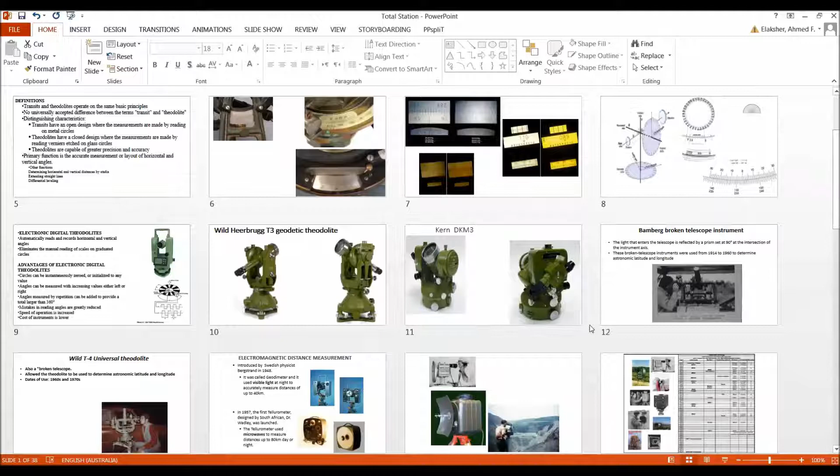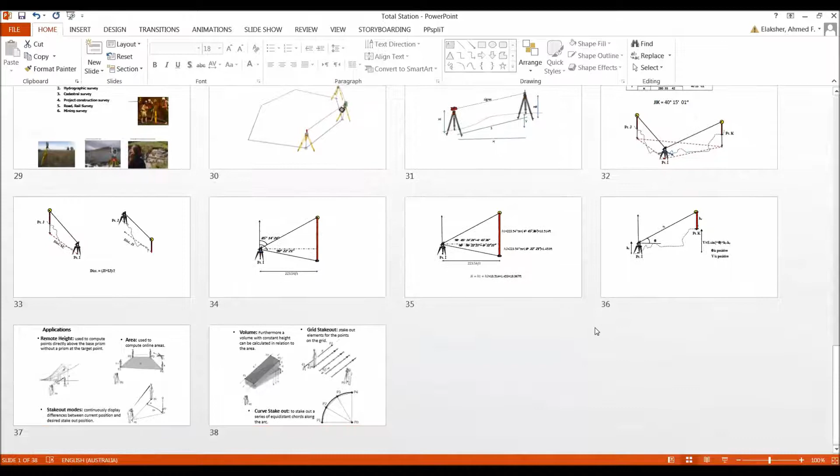How do we link this lecture to the previous one? We've talked about directions, distances, levels, and angles. So the objective of this lecture is to talk about another instrument called the total station. I'm going to go through its different components. It's basically going to measure angles for us, both vertical and horizontal. I'll show you how we measured angles in the early days, since we still use some of this equipment somehow today. Then measuring distances with equipment called EDM, electronic distance measurement, and how we integrated these two into our new system, the total station. That's the objective, and we'll also see some kinds of total stations and their applications.

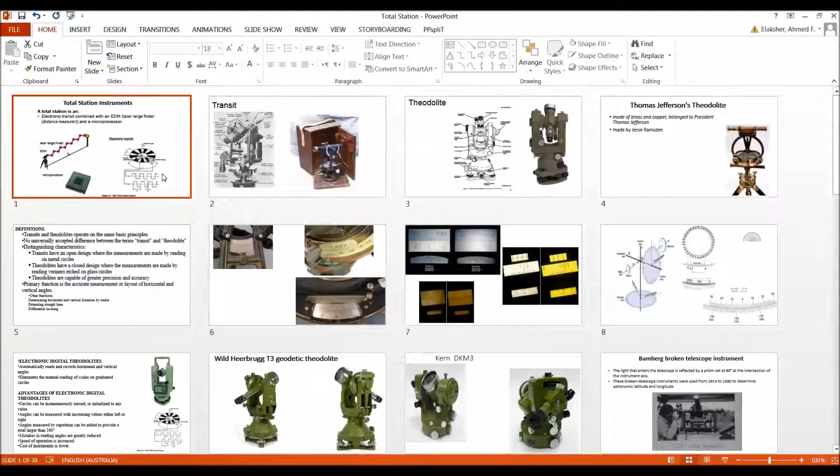So what is a total station? It could be defined as merging two of our old pieces of equipment. Again, old here is a little bit, I wouldn't say incorrect, but we still use some of this equipment somehow.

In the early days, we had what we call a transit, used to measure angles, whether vertical or horizontal.

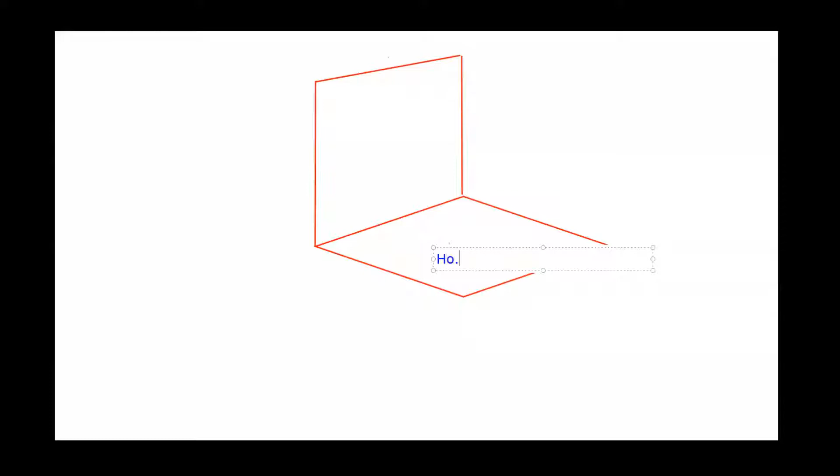I'd like to make sure we remember that in surveying we measure two types of angles. Let me grab this tool. This is our horizontal plane, and this is our vertical plane. In surveying, we can measure horizontal and vertical angles.

Horizontal angles are measured in a horizontal plane. We level our equipment so this surface becomes horizontal, and we measure angles in that surface, which are horizontal angles. Angles perpendicular to this surface are vertical angles.

So back here, hopefully this is a quick intro. This is the transit. I'll show you some of these nice transits. Remember, our objective is to talk about total stations here.

So plus the angles, we also measure distances between the center of the instrument and the reflector, and I'm going to show you that.

If you merge these two into one piece of equipment, that's a total station. Then we add a microprocessor and an electronic storage unit, like a memory card. That becomes our total station.

The purpose of the microprocessor, the computer chip, is to do calculations for us. The equipment measures angles and distances, but the microprocessor can compute components like vertical distance, horizontal distance, and coordinates from what you measured.

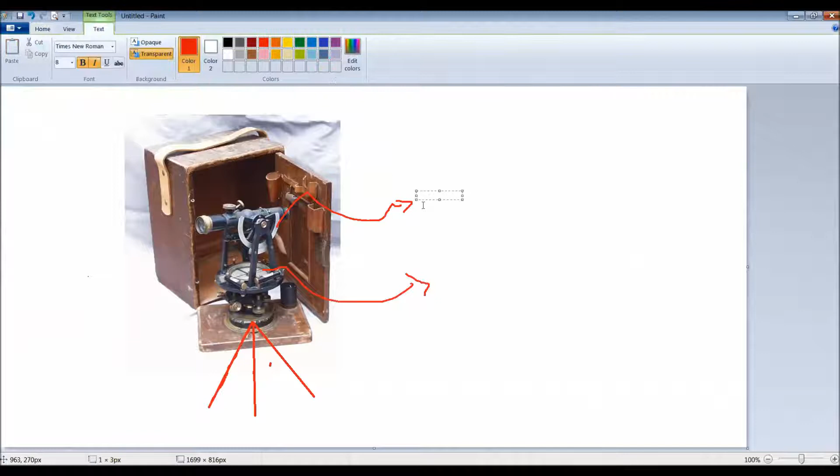So this is here the vertical. Let me make this a little bigger here - vertical circle. And this is here what we call the horizontal circle. So these here are what we use to measure both vertical and horizontal angles.

And you see the vials here, this vial - let me clear the arrows here - this vial and this vial. These are two perpendicular vials that we use to level the equipment through the screws.

So it's kind of what we have now, just a little bit different in setting it up. These are the screws we use to level, and these are the two level vials. So it doesn't really have a circular bubble here.

This is the old transit here, this is the very old transit. And this here is where we set the plumb up. Of course, we didn't have laser plumbing at that time.

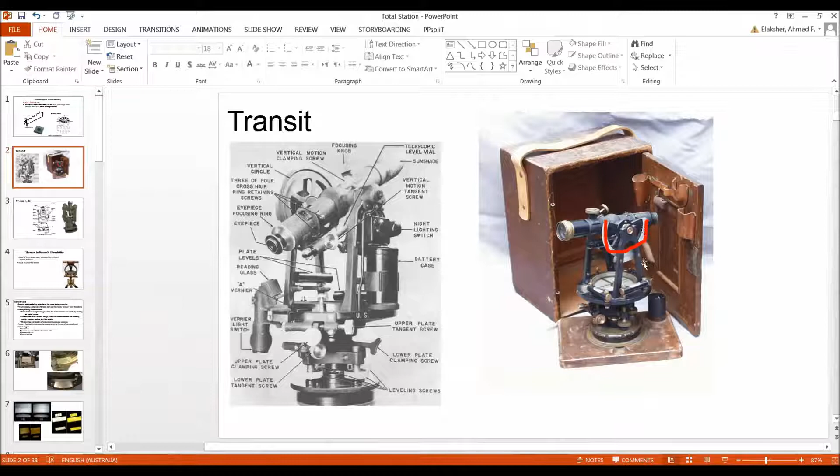Okay, so going back to the total station, so that's the transit here. And then after the transit, if you look at the transits here, to read them you have to look externally. So then they came with what they call the theodolite.

That's the scheme diagram of the theodolite, and that's an actual theodolite here. So the big difference between the theodolite and the transit is they have now the horizontal and vertical circles inside these compartments here. So this is what we call open versus closed design.

I highlighted these differences here, the difference between a transit and a theodolite. So you really, I'm going to go over this, read them quickly, but you really will find everything in this slide here. Okay, let me go to paint and put both of them together.

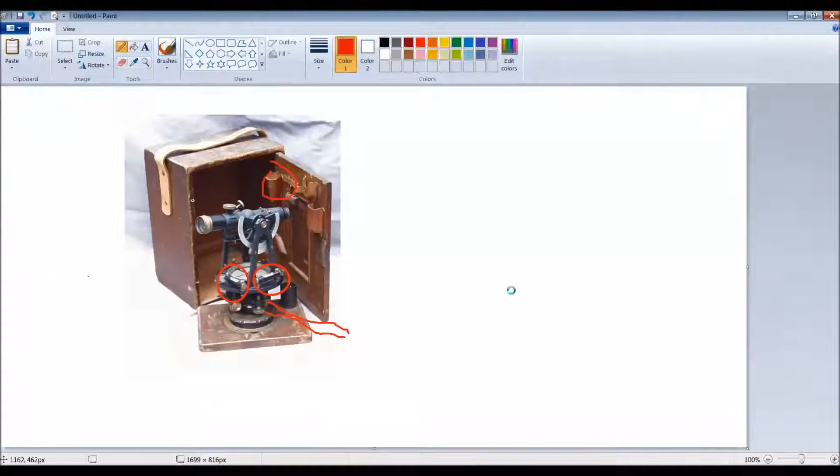So this is a transit here, this is what we call the closed design here. This is the vertical circle, and this is the horizontal circle. Now we see our screws that we use - these are the screws that we use here.

Now, how do we read the vertical and horizontal readings here? Well, the horizontal reading and the vertical readings are going to be somehow, through some mirrors, projected, and we can see it - maybe this is the wrong arrow here - we can see it through this lens here.

So this lens is where we can - this one here is where is the A? - this is where we can look inside and see our readings. So now, since they are closed, we can't really look outside. We can look through this lens and see the readings.

And if you see this part here - I used theodolites a lot, I didn't really use transits, maybe in a competition or something - this is here, you see this piece here. This piece here, if you open this part, you will get the light inside, and the light will lighten the whole thing from inside so you can see it.

In daytime, you reflect the sunlight inside, or in nighttime you can use any outsource light. Okay, we see also some of these knobs here - this is one knob, this is another knob. These knobs here are either used to clamp the circles or to prevent the circles from moving, so you can't really force it to move, so it makes the precise measurements.

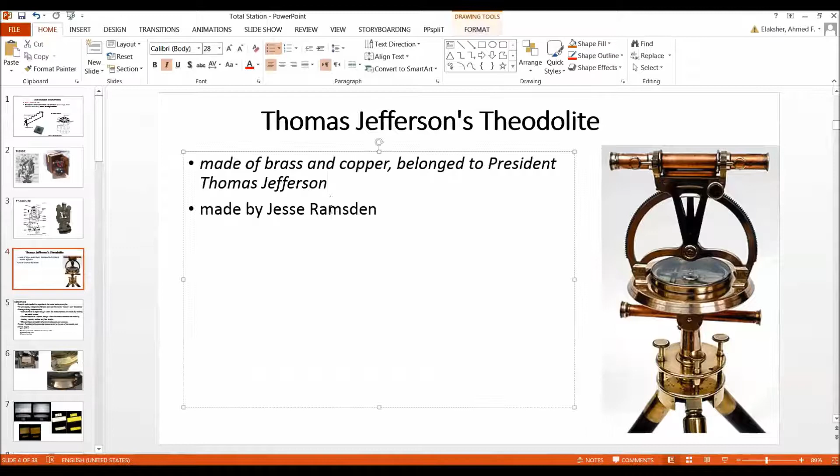Let's see what we have. We have the Thomas Jefferson theodolite, the theodolite that Thomas Jefferson used. That's a very unique antique piece here, I wouldn't call it equipment now, but an antique instrument made of brass and copper, belonged to President Jefferson, and made by Jesse Ramsden.

Going quickly here, transit and theodolite operate on the same principle. We've talked about that. There's no universally accepted difference, except the open design versus the closed design for the transit and the theodolite. Theodolites, since they were more modern than transits at their time, had more precision and accuracy.

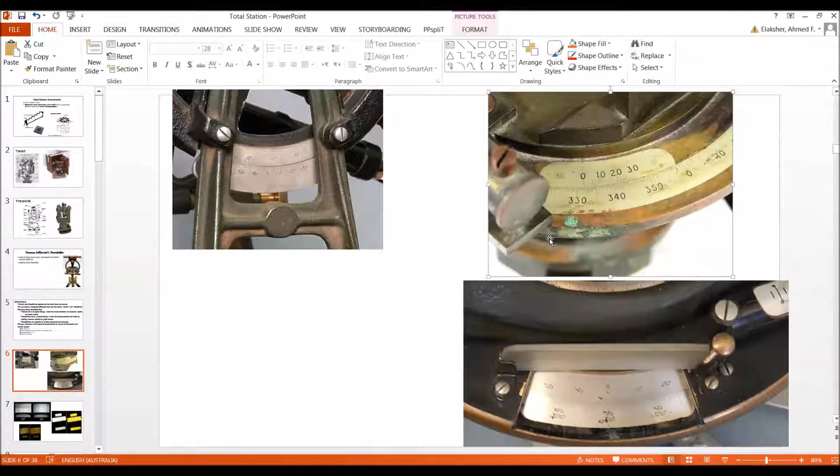Looking a little bit inside, you see the readings here, where we get the readings. I'll pause and you tell me, is this a theodolite or a transit? Some of you are saying theodolite, and that's the correct answer. This is inside a theodolite. You see how the readings are reflected, and it needs some practice to know how to do the readings here. Once you know how to read the vertical and horizontal, it should be simple.

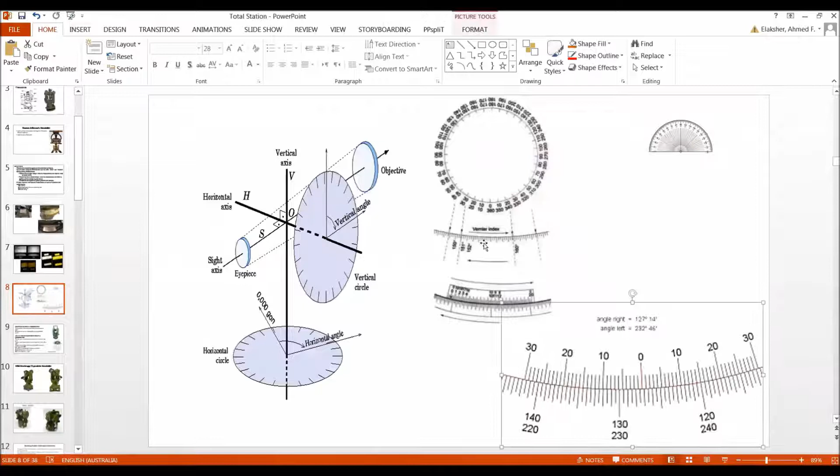So this is from the inside, this is how it operates from the inside. That's just the general scheme here. But let me get this sketch and put it here, and now let's talk a little bit more about the theodolite than the transit.

This is the vertical circle. This is the horizontal circle. This is where you sight, so your eye or the observer will look from here. And then we have the eyepiece, and this is the object lens or objective lens. This is the scheme of this instrument.

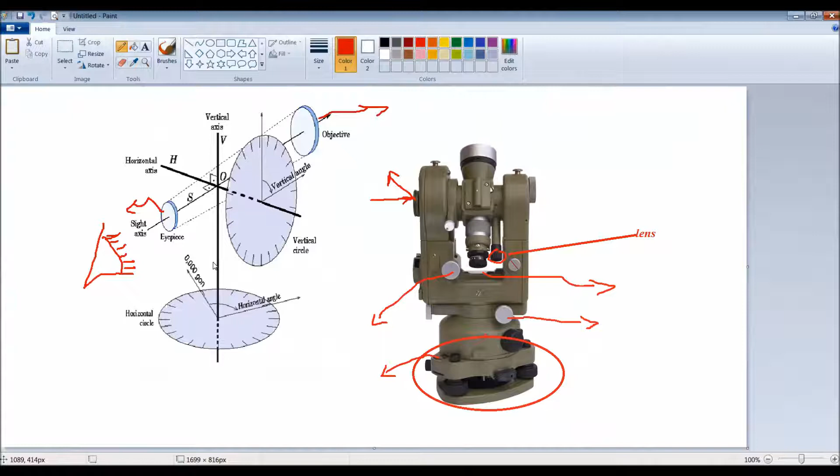Now watch carefully here. We have the horizontal circle, and this is the line of sight. So if I drew here, let me get a clear one so you know what I'm talking about. Let me clean this and put a newer one, just make it a little wider here.

If I drew a line here, this line is perpendicular to the horizontal circle. And I'm going to draw another line, using a different color here, through the lens, so this line goes through these lenses. This is what we call the line of sight.

So if you've got the lenses, let me draw them again. You have the object lens, and then you have the eyepiece. The line connecting the eyepiece, the center of the eyepiece, and the object lens is what we call the line of sight, connecting the center of the object lens with the eyepiece.

If you want to see it in a different way, I can show it to you this way. Let me open a new paint. Going back to our paint, you see this is the scope here. There is a line connecting the center of the eyepiece with the center of the object lens. This is what we call the line of sight.

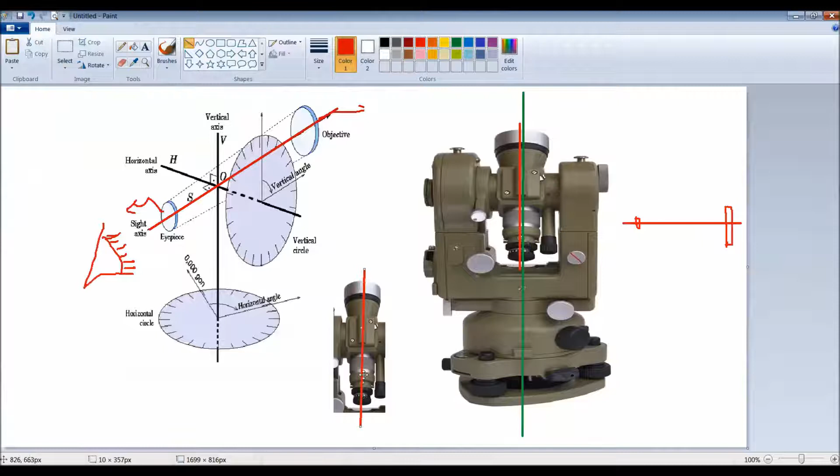This is where you look through, and this is your eye here. You look through, this is what we call the eyepiece, and this is what we call the object lens. So the line connecting both of them, that's what we call the line of sight. This is the red line.

And there is another line that I just highlighted, which is perpendicular to the horizontal circle. So if I go back here and cut the horizontal circle, bring it here, this is our horizontal circle. There is another line perpendicular to the horizontal circle, this line here. Let me draw it in the same color, this green line, which I'm highlighting here as green. Hopefully we see these lines here.

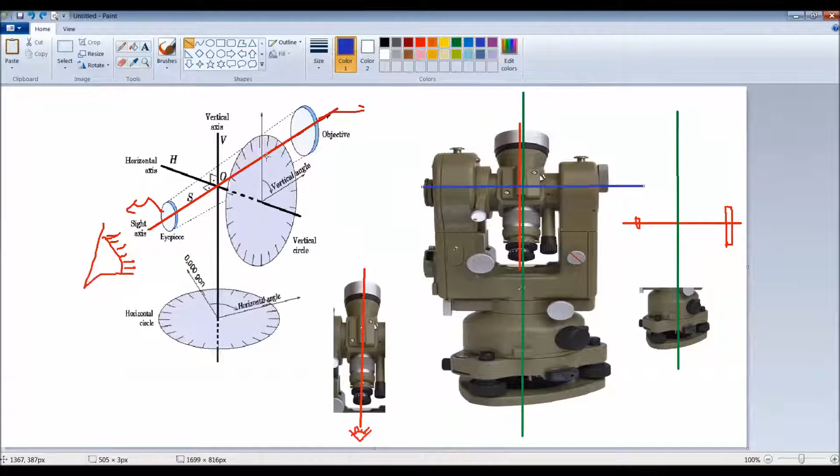And then there is a third line, which is perpendicular to the vertical. Let me draw it in another color, which is this line here. That's the line perpendicular to the vertical axis. If I draw the vertical circle here, this line is what we call the horizontal axis. Sorry, did I say this is the vertical? Let me write it down, maybe I was saying them wrong.

So this is what we call the horizontal axis, and the green one, which is this one, is the vertical axis. Let me also write the line of sight.

Okay, so these three here have a geometric relationship. We are going to talk about the geometric relationship between the horizontal axis, the vertical axis, and the line of sight. These three lines have to be perpendicular. So this is what we see here.

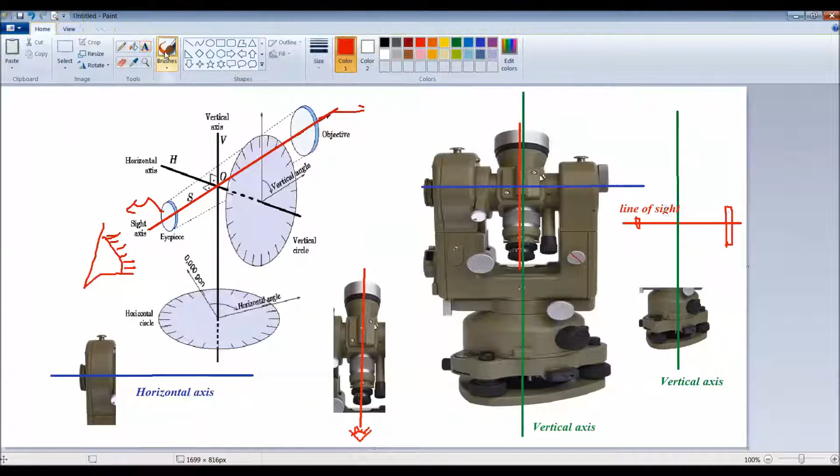We see the line, let me come to this diagram here. Okay, so the first thing is you see the vertical axis, which is in green. The vertical axis and the horizontal axis, and from the names they have to be perpendicular. You see the horizontal, I drew it in blue, going with the colors here. So the vertical I drew in green, horizontal in blue.

So these two lines have to be perpendicular, the blue and the green. That's a very important concept. Due to a lot of things, the instrument could be defective, not calibrated, malfunctioning, all of these different things could cause these two lines not to be perpendicular and give you wrong readings. So you have to calibrate your equipment every once in a while.

Plus the blue and the green line, yes, they have to be perpendicular, as you see this perpendicular angle. The other thing also, the red, the line of sight, and the horizontal axis have to be perpendicular. So these two also have to be perpendicular, the red and the blue, which are the horizontal axis and the line of sight.

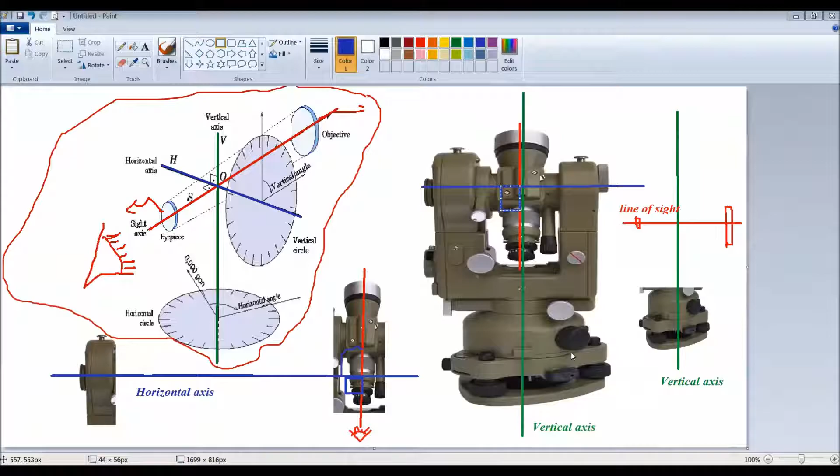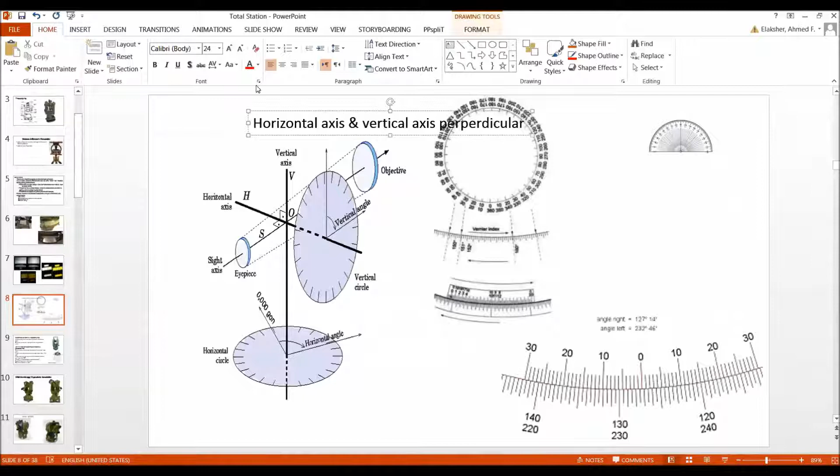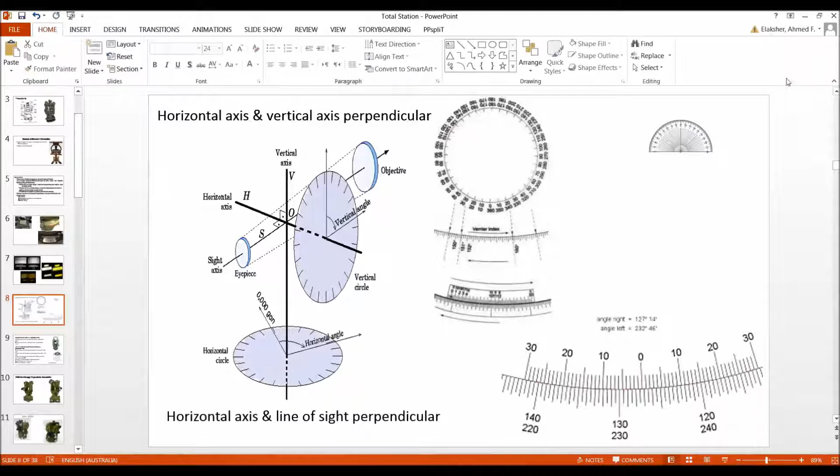So these are two important geometric relationships that have to be satisfied between the different components of the equipment. That's the important geometric relationship. I'm going to write it here. I didn't want to write it in the presentation before I show it to you. So: horizontal axis and vertical axis have to be perpendicular. And then the next thing is, the horizontal axis and the line of sight have to also be perpendicular. So these two have to be perpendicular.

Okay, so we were just talking about the different components of a theodolite, and just to highlight another advance in the theodolite equipment, that's what we call the electronic or the digital theodolite. So with the digital or electronic theodolite, now everything is done digitally. You get the readings on a display. The readings are done automatically.

Actually, what happens here, instead of using our protractors or the optical ones, now we use digital protractors, or digital circles. It's a little bit more electrical engineering here, but there is this rotating circle, and the rotating circle has alternating white and black sectors. Light passes through, and once you rotate it, there is a sensor that can sense how many sectors you rotated. The sensor can determine how many sectors you passed and then convert this into a horizontal or a vertical angle.

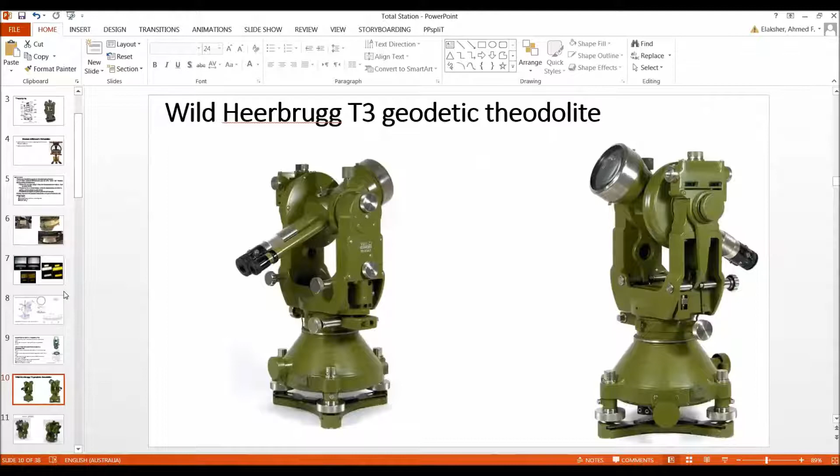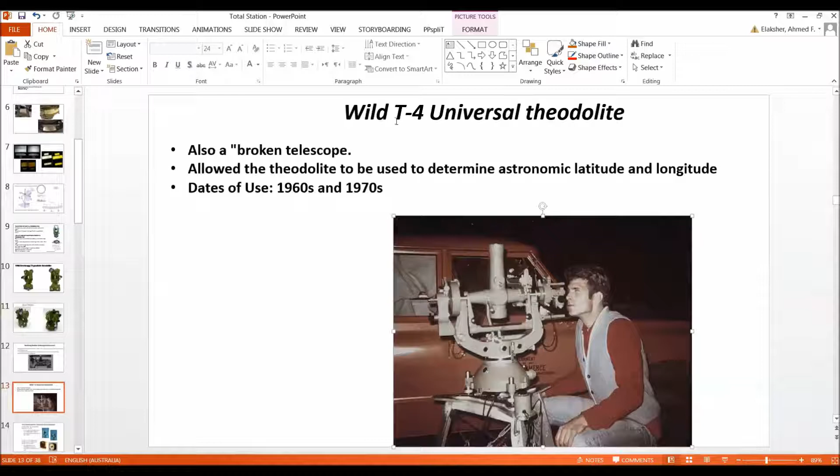And the idea here about using the broken telescope is we are observing stars, and stars have very high altitude. So if you looked at the star here with our equipment, that's the tripod, and the star is going to be all the way somewhere here, and we have a star here. Yeah, so with that altitude...

If this is the vertical axis here, and you are observing the star, let's pick another color here. This angle here is going to be too small because you are observing Polaris and such stars. So you might have difficulties observing these stars, and that's why they made the broken telescope here. That's why they had these broken telescopes. That's not really an important part, just wanted to show you.

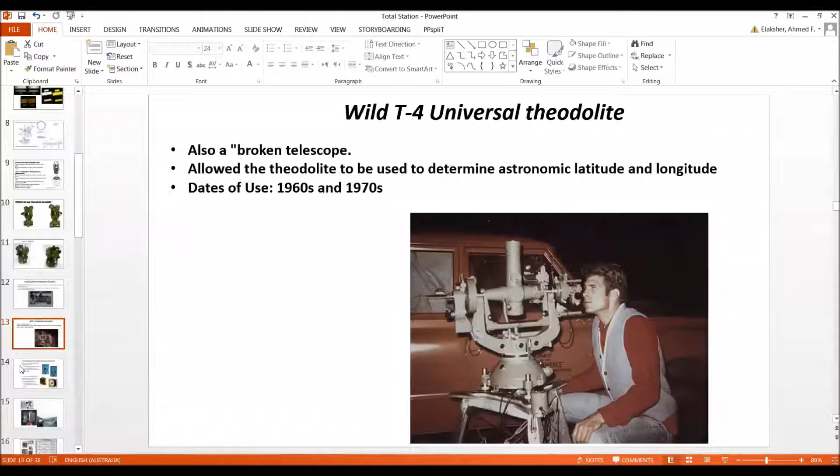Now we go to the second.

Okay, so the second part of the equipment, of the total station, if you still remember, is the distance measurement unit, and that's done through an electromagnetic device, or an EDM device.

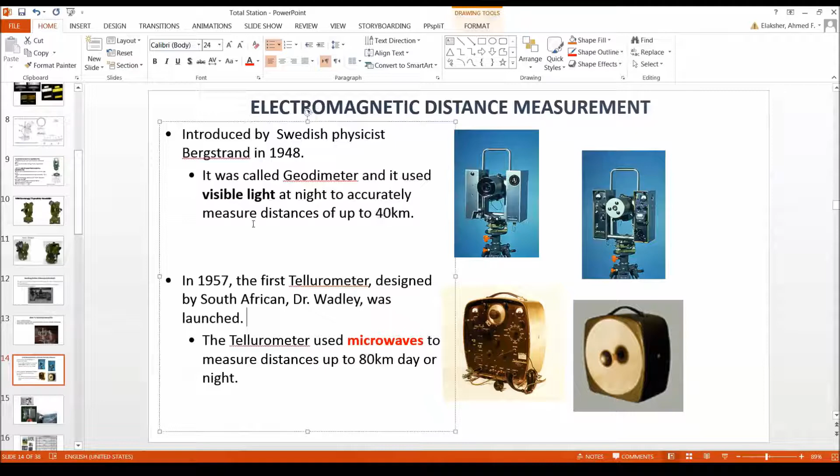Then, about 9 years later, came what we call the tellurometer, and that was designed in South Africa by Dr. Wadley. The good thing about this instrument, the tellurometer, which is the one we see in these two images to the bottom right of the screen, is that it used microwave, and this is what I'm highlighting here. So with microwave, we could use it daytime, nighttime, plus also it had a longer range, which was 80 kilometers. You don't really need to know or remember the ranges, but you need at least to know which one was using visible light and which one was using microwave.

So we'll take a look at these, but this is just one of the early models, or actually two of the early models here. You don't really need to memorize the range and the accuracy, but I'm just going to grab this here and go to paint and highlight some of the properties of each of them.

So let's see, paint will show up here. Paint is here. Okay, so this is the picture I had here. So in the early 60s, we had the MRB2 that had a range of 40 kilometers, but an accuracy of 1.5. If we zoomed in a little bit here, this is the one I'm talking about for those who are watching. We'll highlight this. So the MRB2, that's the one here, and it had an accuracy of 1.5 meters.

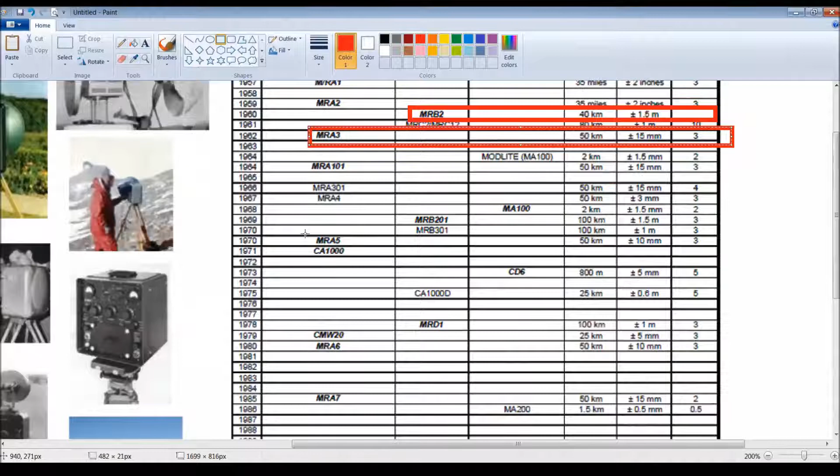The early ones that had good accuracy were the MRA3, and that had 15 millimeters. Again, you don't really need to memorize or recall these. And then in the 70s, we had the MRA5, that was about 10 millimeters. In the 80s, we had the MRA6, almost the same as the MRA5.

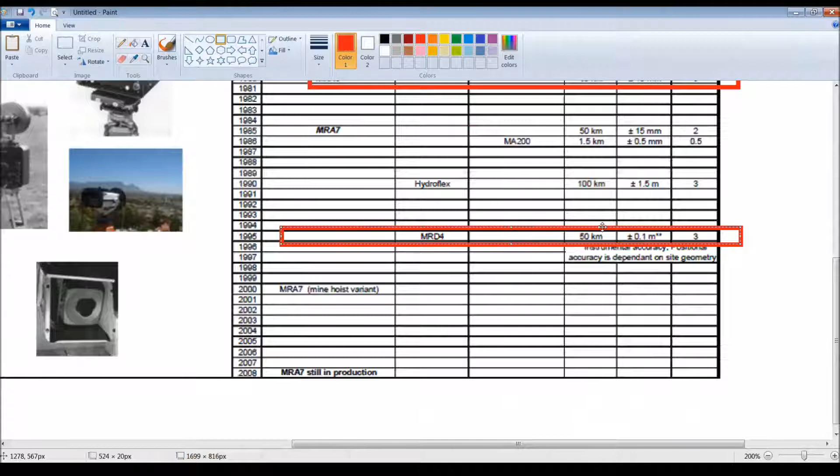In the 90s, we didn't really have a lot of new ones. The other one that I would like to talk about is the MRD4, which had about a decimeter accuracy. You know, 0.1 meter is 10 centimeters is 1 decimeter. So these are a few of them. You don't really need to recall them or memorize them. This is just some of them.

Okay, so back to the presentation. These are some of them. How does it work? Here is the important part. Let me put this into slide show mode and share the slide. Okay, so hopefully this is working.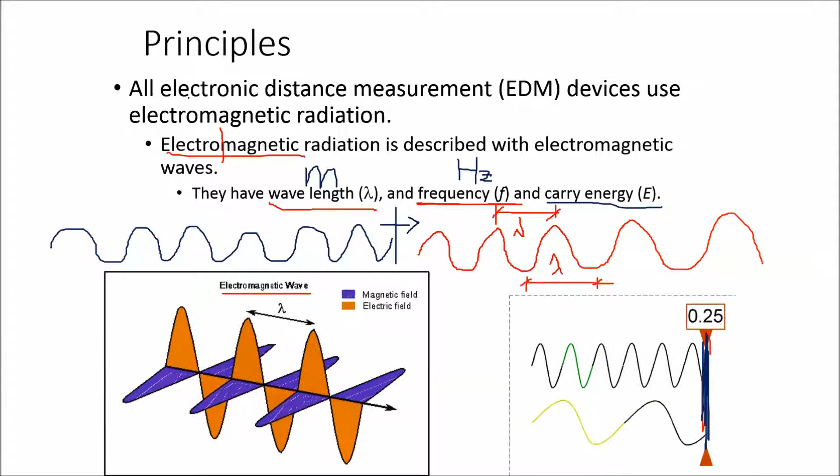The next slide shows the big spectrum of electromagnetic waves. It starts from gamma rays all the way to radio waves, or flipped, from radio waves to gamma rays. The wavelength of gamma rays is about 10 to the power of negative 12, with a frequency of 10 to the power of 20.

Radio waves have wavelengths of about 1 meter, and their frequency is about 10 to the power of 8.

Our eyes are only capable of seeing a very small, tiny part of the electromagnetic spectrum, which is what we call the visible part of light, ranging from 380 nanometers to 780 nanometers, which is 3.8 times 10 to the power of negative 7 to 7.8 times 10 to the power of negative 7. So that's what our eyes see.

So what does this have to do with our class, with our part? Because all of the EDMs, or electronic distance measurement devices, operate in this range here. That's the range.

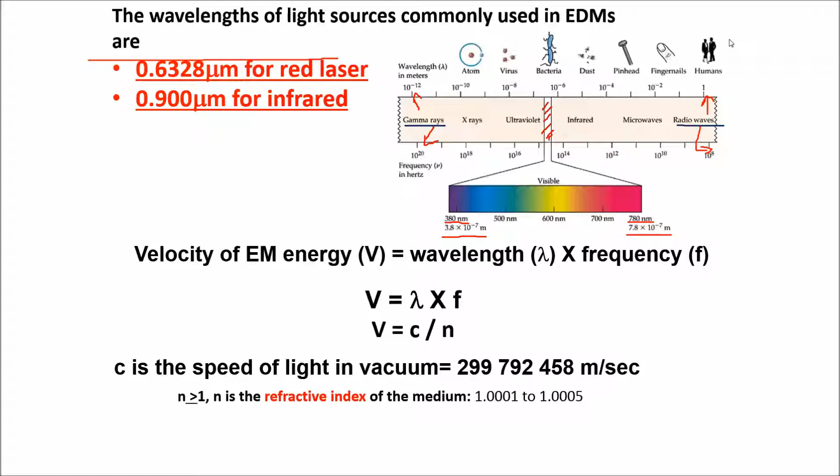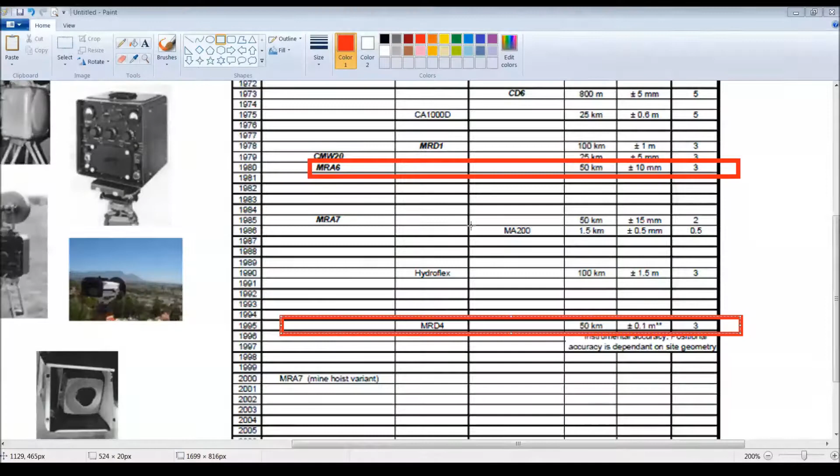Let me end this and go and take this here, and then go to paint. No, doesn't work, okay, don't save.

Our EDMs, our electronic distance measurement devices, work in the range shown in the PowerPoint slide, let me grab this for you guys. They work in this range, 0.6 to 0.9 micrometers. So some work very close to the visible light, using infrared and red lasers. Depending on the instrument, the company, the brand, they work in this 0.6 to 0.9 micrometer range, very close to visible light.

So most of them work in this range. Remember: red laser, infrared. I'm not really interested in the exact numbers, but at least know the red laser and the infrared.

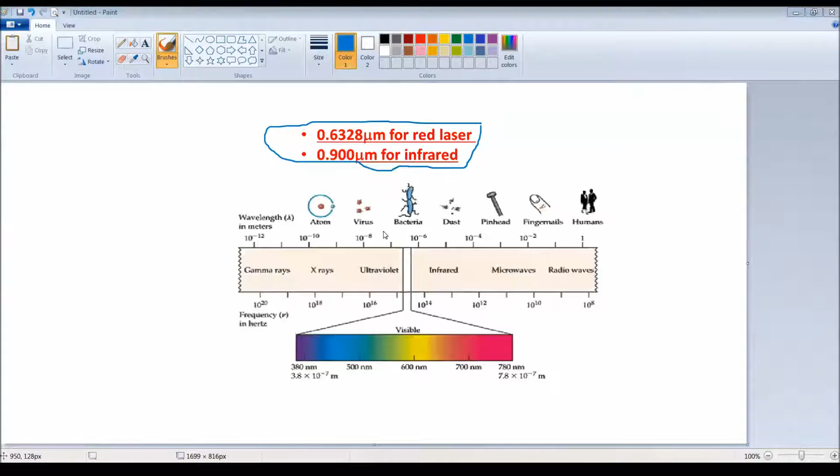Going back to total stations, or the EDM: when these waves propagate, I mentioned they have an energy, and a very important characteristic of that energy is its velocity. How fast does this wave propagate in the air or the medium carrying it? That's a very important thing.

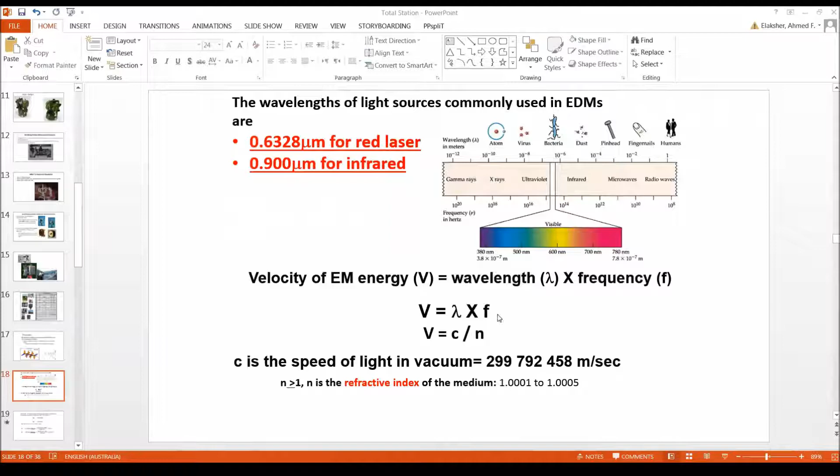I'm going to take this screen to paint to talk about it in a bit more detail. So, new, don't save. Let's take a look at this velocity thing.

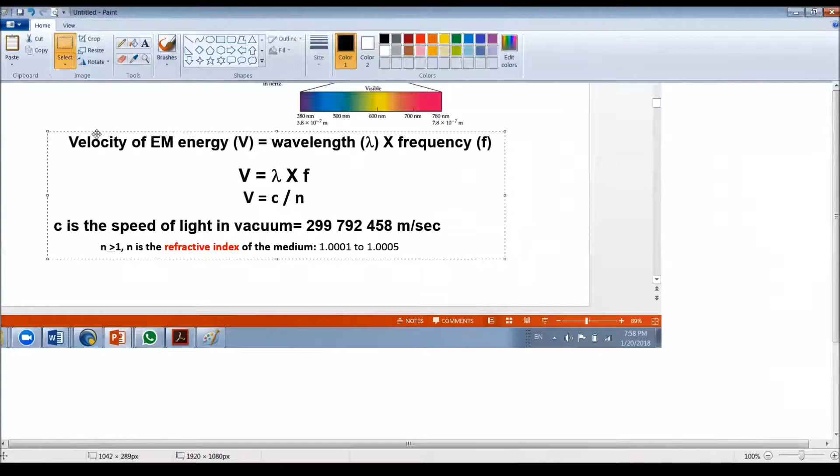Getting back here, this is the equation we are using, and we were saying that this wave is going to propagate like this, and when it propagates, it's going to propagate with a speed. This speed is really very important for us, whether it's propagating with V or C. So what's the difference here?

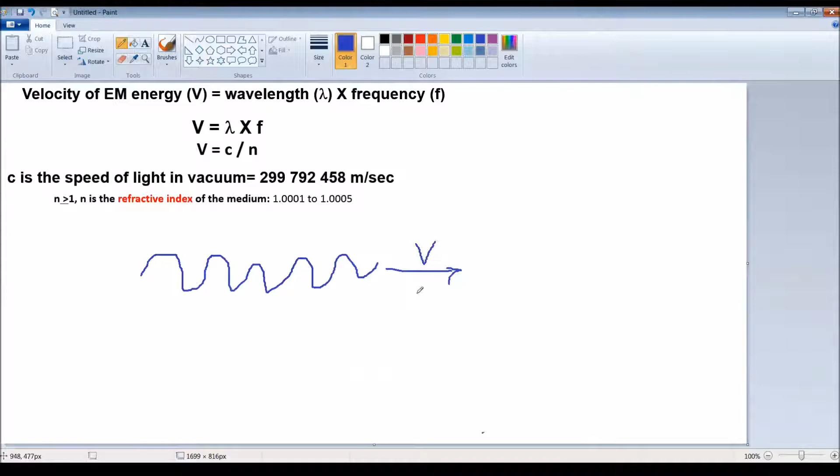If it's propagating in vacuum, that's the speed of light. It's going to propagate with the speed of light, which we usually call C, equal to 3 times 10 to the power of 8 meters per second. That's the speed we recall from physics, in case it's propagating in vacuum. Let me highlight this for you here.

So when they propagate in different media, what's going to happen is they are going to be slowed down, because instead of propagating or moving in a free vacuum, they are going to be faced with the particles of that media. So they are going to be slowed down. And that's why when they propagate in a media, this C here is going to be a little bit less.

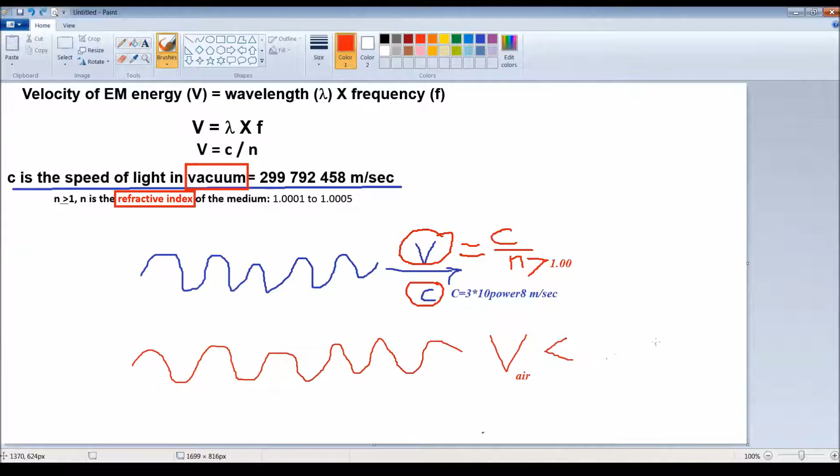But the v is for sure going to be less than n. So the v is for sure going to be less than c. Just typing n. Why? Because we divide by n. That's a good c. Now, okay, so now we know that v is less than c.

What's the next thing? Well, we also know from this equation that v equals lambda times f. So let's see an example here. How do we apply these equations to determine either lambda or f?

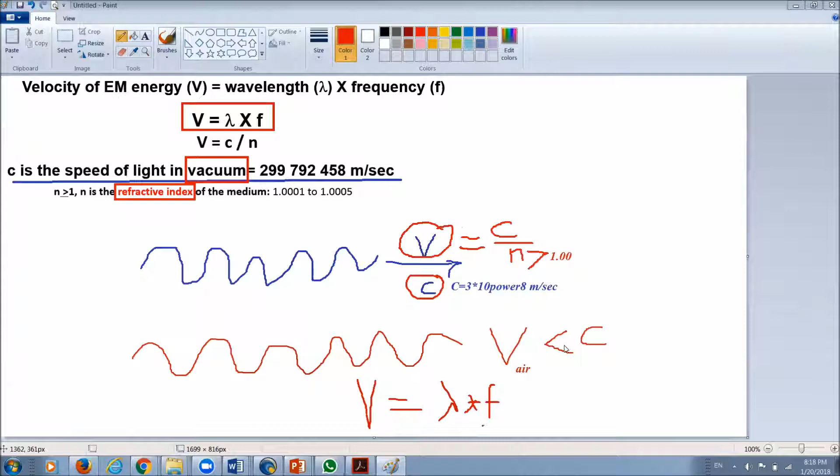Let's see the example I prepared for you here, which is this example. I'm going to take it and put it in here. Let me make sure I'm sharing Paint here. Actually, I was not sharing Paint, so now you should see the example here. So let's read it together.

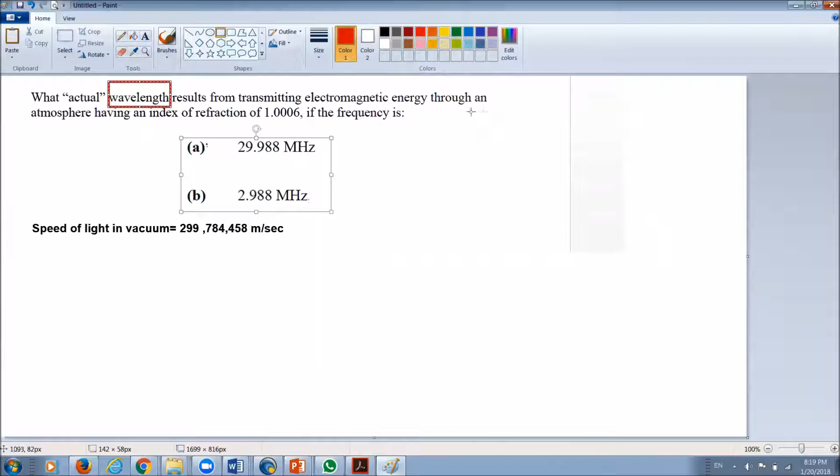We're looking for the actual wavelength. I usually like to highlight what's given and what's required. So it's asking us for the wavelength resulting from transmitting electromagnetic energy through an atmosphere having an index of refraction, so n is given. If the frequency, and I'm going to work with A and let you guys work with B, you're given the frequency, and you're also given the speed of light in vacuum.

So if you think about it, you know that V equals exactly lambda times F. At the same time, V equals exactly C divided by N. So what in these five are you given? You are for sure not given V, you are given F, you're not given lambda, so that's a question mark, that's the required. You are given C and you are given N.

So what can you do here to get lambda? Exactly, you just rearrange terms. You say lambda equals C divided by N. I'm just going to make it in one line, and then add another denominator here to put the F. That's it. And then you plug in the numbers.

Let's plug the numbers here. Let's see if this thing is going to help us. So what's C? C is this value. Okay, Control copy, Control C. Perfect. And then you divide this, let me use the correct color here, by N. Actually, working with a computer is nice here, instead of writing these numbers by hand. Paint is helping, oops, I need to copy this.

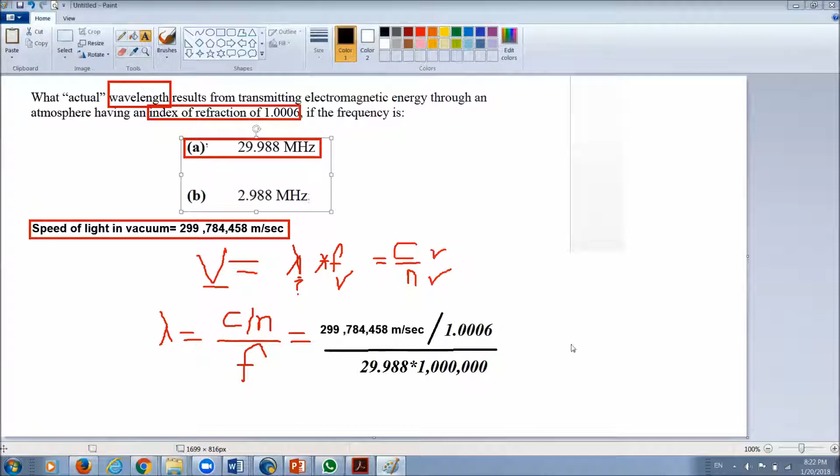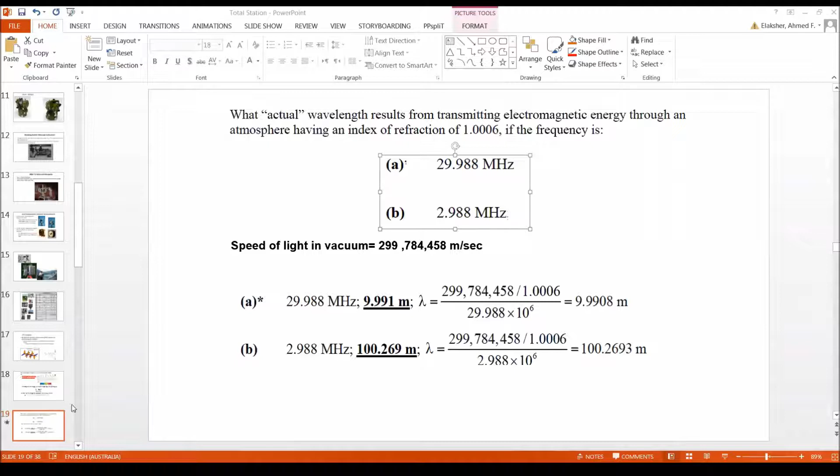And then you do the math and you get the answer, and the answer is displayed for you here. It's 9.9908 meters. And you have another example here, so please work it out also and make sure you get these numbers correct.

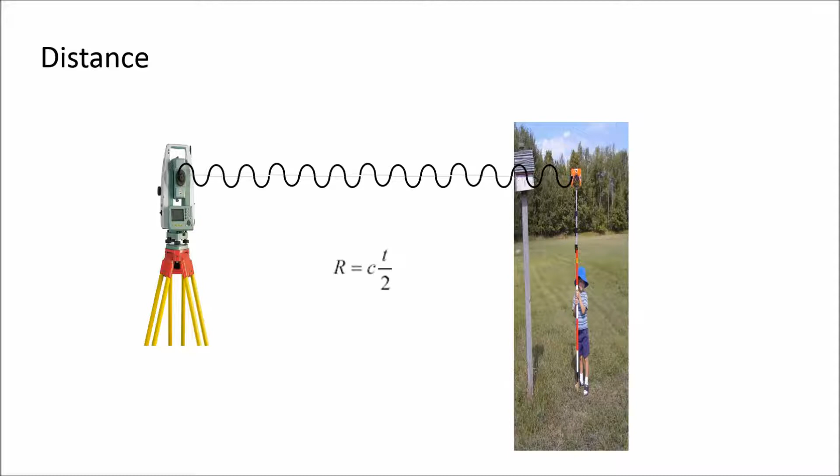Now, to understand this in very simple terms, that's not really the actual math model. But this wave here, to just simplify things, did go hit the reflector and bounce back. So it took a time t to do that. And if you multiply this time by the speed of light, if it's vacuum... some of you will say it has to be the speed of light in this media. I agree with that. So for simplicity, let's assume that it's 3 times 10 to the power of 8.

That will give you this distance going and coming back. So this is the distance here. However, the distance that you just computed is twice the measured distance. So you have to divide this by 2. And this is the equation you see here: if you multiply the speed by the time, you get the distance.

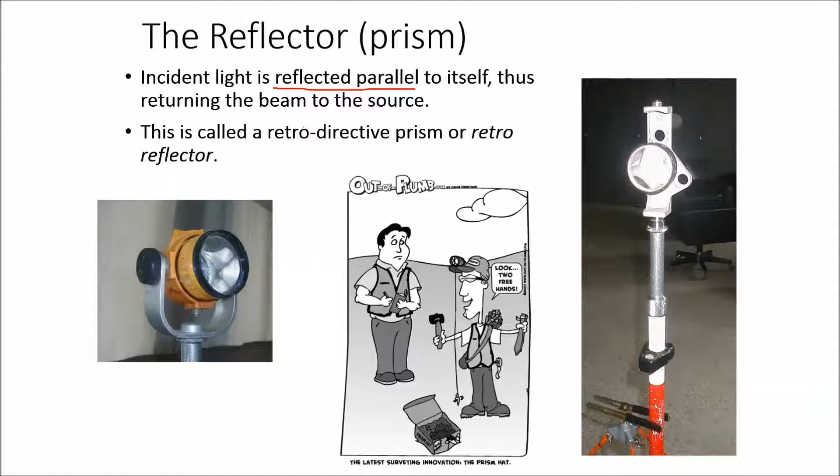Okay, these are the reflectors. You see here, all the reflectors are made of these reflected parallel glasses themselves. And the purpose of using the reflector is to orient and bounce back the light or the laser beam, or the electromagnetic wave.

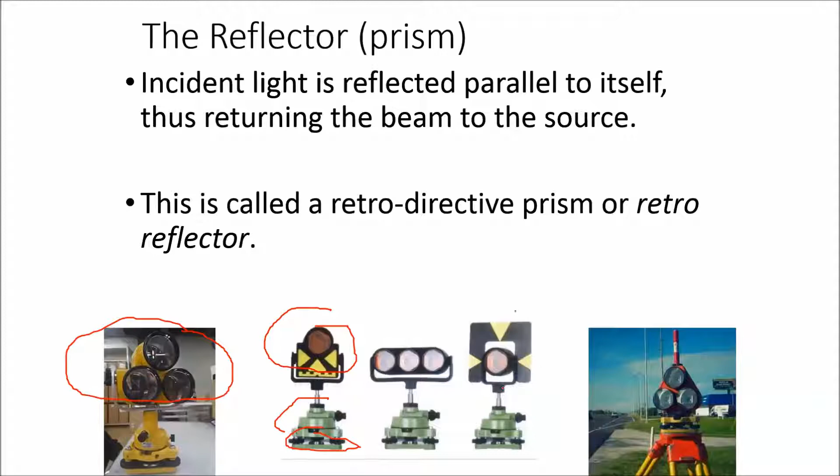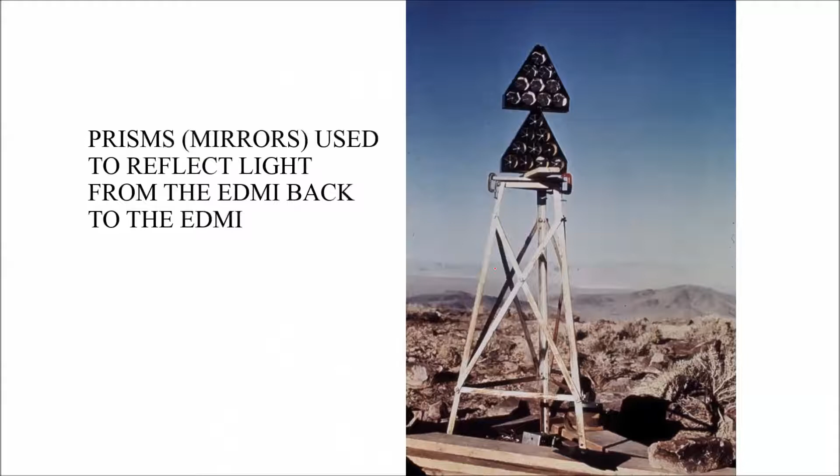We have different styles of the reflectors. We have the triplet for long distances. We have the single ones. This is the tribrach here, and it has to be leveled, or we can use the reflector on the prism rods. These are some of the early versions here. You see how many prisms we are using. This is for very long distances here, and this is the laser for these very long distances. This was during geodetic measurements here.

Now, we do have what we call reflectorless total stations. And please be aware, reflectorless total stations are completely different than the robotic ones that I'm going to show you here. There is a big difference. Robotics could be reflectorless or not. Reflectorless could be robotic or not. So the ones we have in the lab that we are going to use are reflectorless.

Okay, I'm back. Let's go to the screen. So just make sure the signal is not interrupted when it's bouncing back.

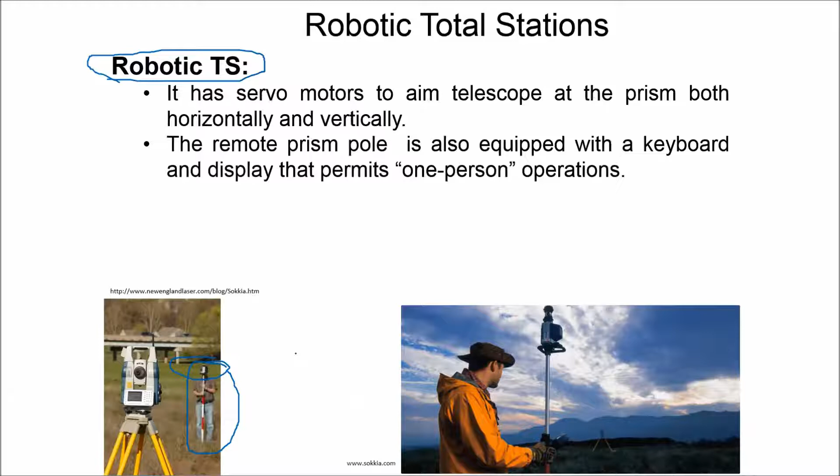Nowadays we have the robotic. What is the robotic? The robotic is just the total station operated by one person. That's the whole thing about the robotic. So he has a data collector that can talk to the equipment and can orient the equipment from far away. That's really the thing, but it can still work with a prism or without a prism - it really depends, but that's the whole idea. So you have a keyboard or the data collector that can do that for you.

Now, some of the sources of errors: personal errors, careless centering of the instrument or the reflector. Make sure you center it correctly and plumb it. Error in measuring the instrument and reflector height - when you use this equipment, you have to make sure that you measure the instrument and the reflector height and input them, enter them in the system. So you have to make sure you are doing this correctly. We talked about the velocity, the speed of light - this is affected by temperature and pressure, so usually we measure the temperature and the pressure and input them.

Mistakes in making readings and writing them down - if you are not using the memory cards, make sure you double check your readings when you write them down. Now, some of the natural problems here - we talked about this wave. So what if this wave, in very long distances, going from the EDM to the reflector, what if it's interrupted somehow? Let me get the highlighter here.

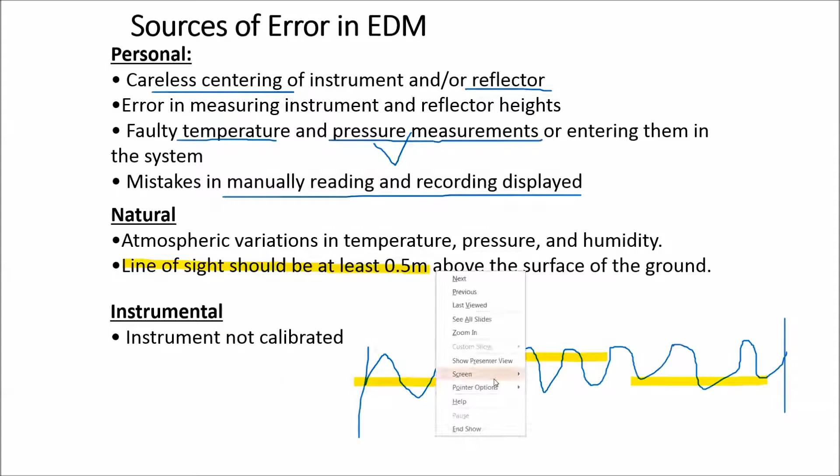So it's going through different atmospheric conditions here. Temperature will vary, and that can affect your measurement. One of the problems is that if the line of sight is too close to the Earth, the beam or the light, if it's too close to the Earth's surface, the laser will have much more refraction and it will bend more.

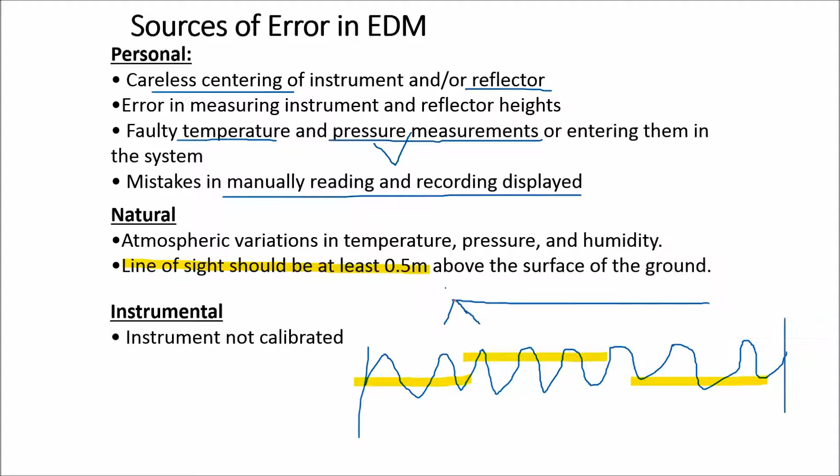So if you remember, this is the instrument, and let's say we have the laser going in a straight line. If you are too close to the ground here, this light is going to... oops, it didn't bend with me. Well, let me draw it in. Okay, let's go to Paint.

And let me make sure I'm sharing the screen. I did record a lot of these videos and forgot to share the screens, so I had to redo them. So this is the instrument. Am I sharing Paint? Yep.

This is the tripod, and then we have the instrument here, and then we have the light ray, and let's assume the light ray is a straight line. In all cases, it's not really going to be a straight line, it's going to bend a little bit, but if you are too close to the ground, it's going to bend much more here. Of course, the bend is not that big, but I'm just demonstrating it here with the mouse.

So that's a critical factor here. Going back to my presentation, you have to be careful with that.

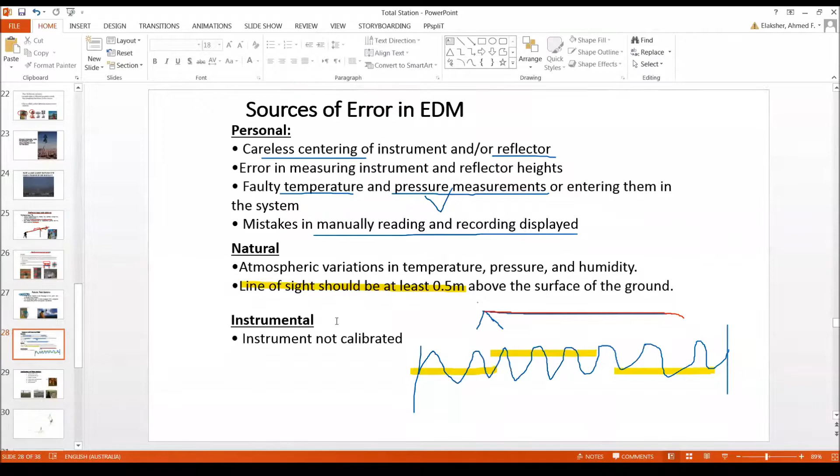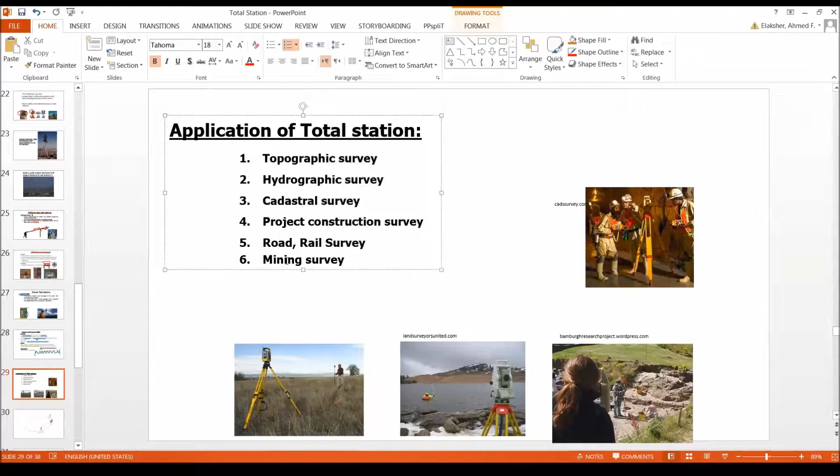Some of the applications you can use the instrument in: topographic surveys, where you measure the shape of the Earth, create maps, contour maps, map buildings, ground, all of this. Hydrographic surveys, when you map oceans, lakes, shorelines. Cadastral surveys, when you are doing boundary surveys. Construction — we use total stations a lot in construction projects. Route surveys like rail and roads. Mining surveys, when you are doing surveys under the earth. So all of these are different applications here.

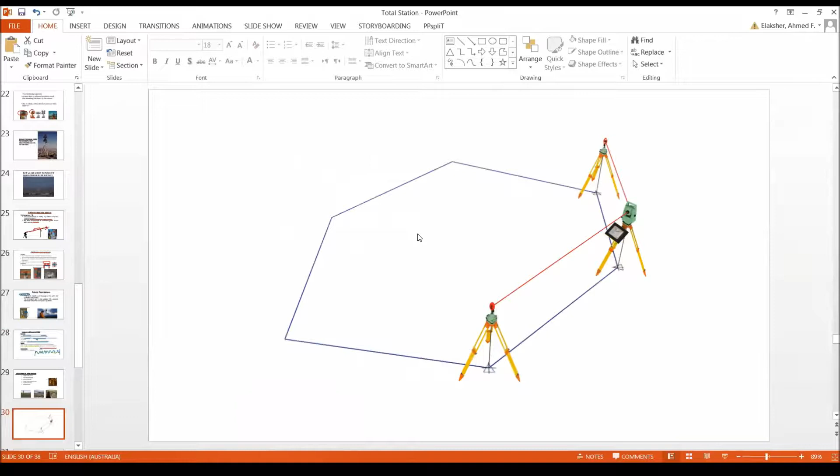And of course, you are using the total station in your 134 labs to do the traverse and then to do the mapping. So just to highlight that.

Now, the very basic and important thing — let me hide this from you guys. That's just a tripod here, using it for this class.

The very important thing I would like to highlight is that the EDM or the total station is measuring the slope distance, because the signal is going through the slope line. So what's being measured is the slope line. I need you to be very careful with this — it's not measuring the horizontal or the vertical distance, it's measuring this red line here.

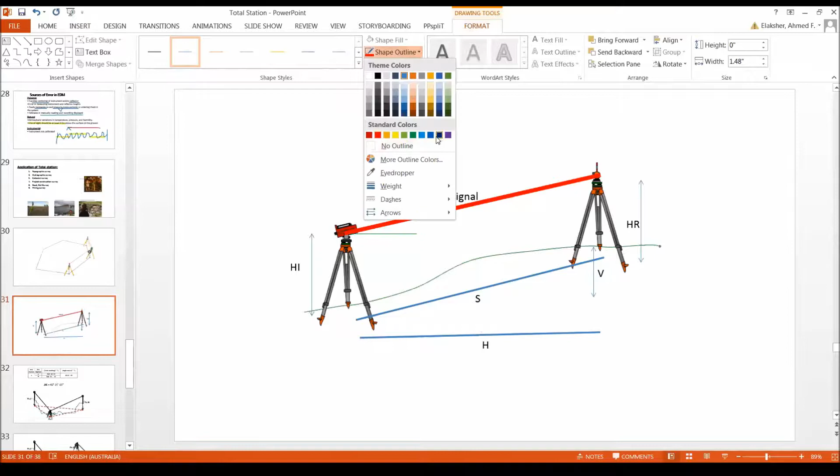Then you can use the angles that it measured. You can use the vertical angle that it measured — let me highlight this here. You can use the vertical angle between the signal and the horizontal plane to compute horizontal and vertical changes.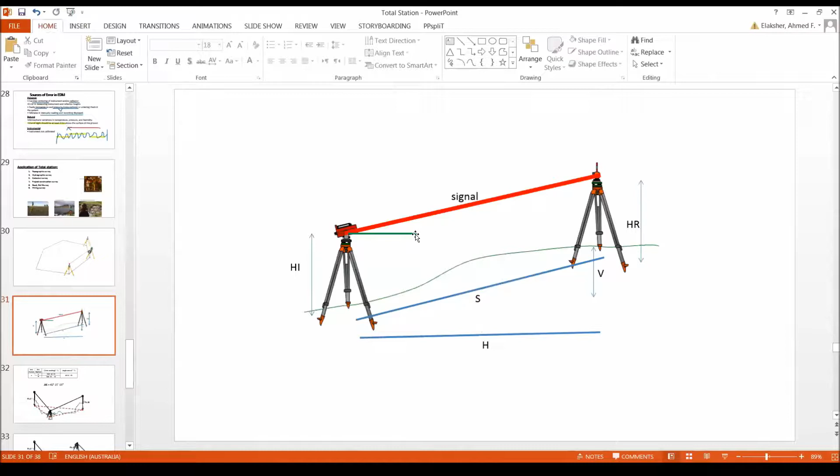So let me show you some of the things you can measure. With this here, we can measure the horizontal angle.

So I'm setting the equipment at point I, first looking at point J, and on the horizontal circle, I read the 240, 40 — the number I'm highlighting here. Let's make it 24 so you guys can see it, and bold it — it's actually bold.

And then you turn the equipment. Remember we said we turn clockwise. You turn clockwise until you hit the other point, point K. And then you measure the angle and you get another number.

What's the horizontal angle here? It's the difference between these two readings, and that's what I'm showing you guys here. You got 240 at the first one, you got 280 minutes and seconds, and the difference is 40-15 here: 42 minus 41 is 1 second, 55 minus 40 is the 15 minutes, and 280 minus 240 gives you the 40 degrees. So that's our horizontal angle.

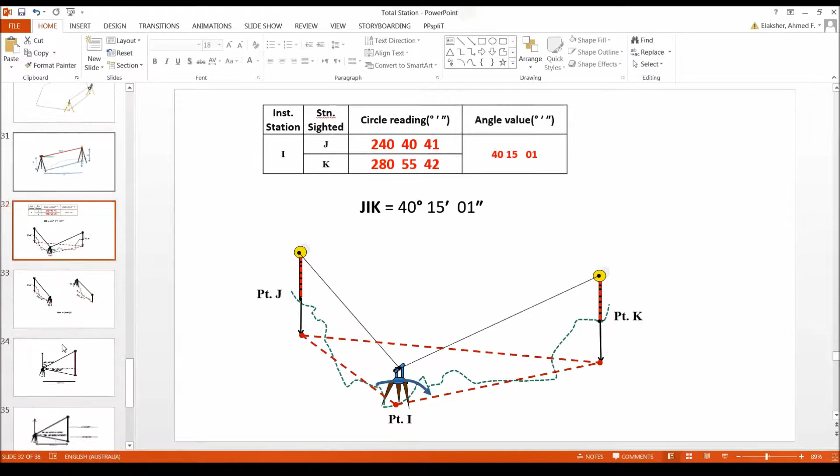We can measure distances. Usually when we measure distances between, let's say, point I and J, it's preferred and recommended that you measure it from both ends and then take the average — that's what you are going to do in your labs. So that's how you can take distances.

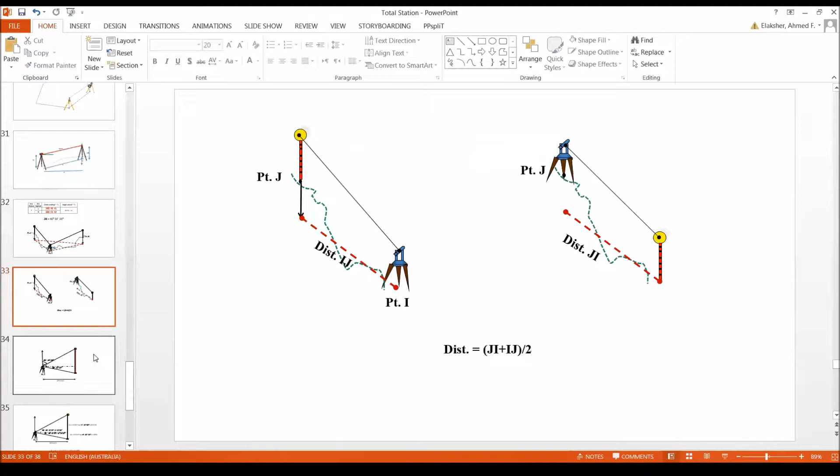You can also measure vertical angles. Now, be careful when we talk about vertical angles, because the instrument, when it's set up... let me get the instrument here, let's get this print screen and go to Paint, because that's an important concept here.

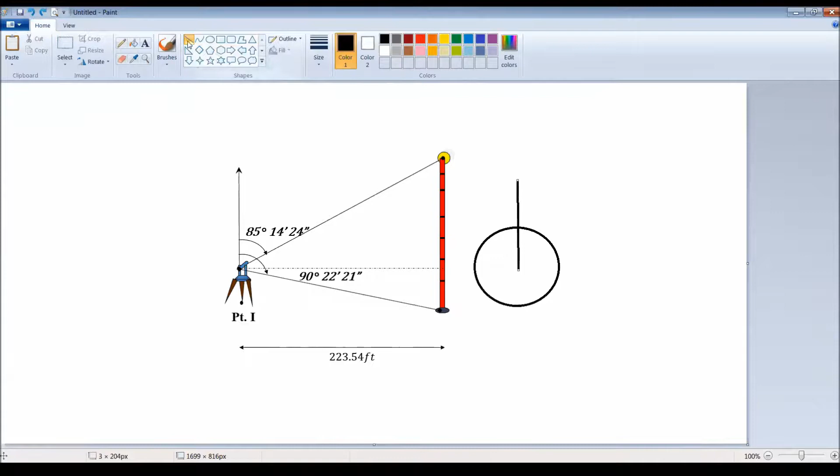Where is the 0 here? Well, the 0 here is all the way looking to the top here. So this is where the 0 is going to look to. This is our 0 here. This is where the 0 is. Let me write it down. This is 0.

And then on the vertical, but opposite to the 0, so here you see 180. So this is the 180 of the equipment. That's important here. What does this mean?

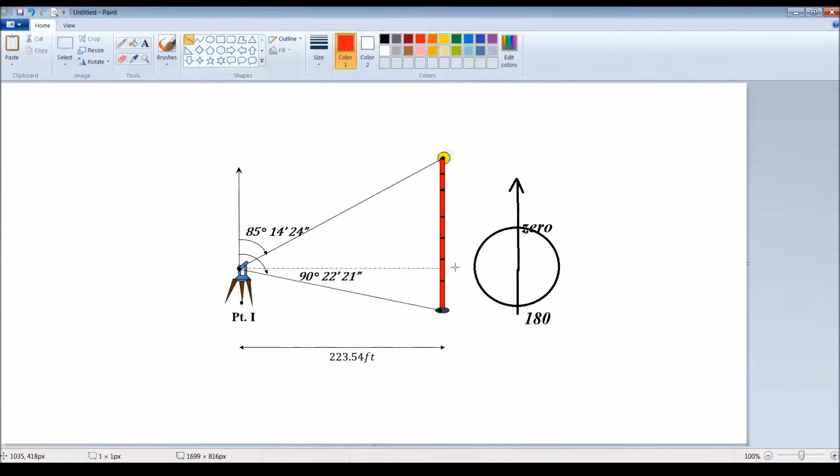Why did I do all of this? Well, I'm showing you all of this so that you know when you are looking exactly horizontal, when the telescope here is looking horizontal. Can anyone guess what the reading will be if I'm looking this way? This is my scope here. This is the objective lens, and this is the eyepiece. That's a nice scope here. What is the reading when it's horizontal?

Exactly, it's going to be 90 on this side, or if you are looking backward, it's going to be 270 on this side. So when you look here and you see the 90, that means you are looking horizontal.

What do I want to tell you also? I want to tell you if you are looking downward, like in this direction, what do you expect the reading will be? Exactly, it's going to be a little bit above 90 if you are close to the horizontal surface, so it's going to be between 90 and 180. And if you are looking up, the reading is going to be between 0 and 90.

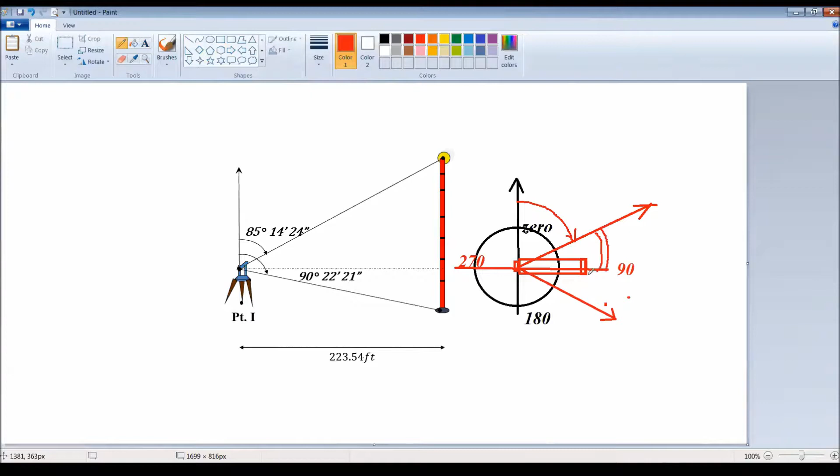So where is your angle here? This is the angle that the instrument is measuring. That's what we call the zenith angle. But your vertical angle is this angle here. I'm not really going to put it with an arrow, but just let you know, if you are here, it's going to be positive. If you are here, it's going to be negative.

So this is what we call the zenith angle, and the zenith angle here ranges from 0 to 180. So if the zenith, which is the reading on this plate, is 90, that means you are having a vertical angle of exactly 0. How many times can you see a zenith angle of 0? You never can see that, because then your scope is looking straight upward.

Hopefully that makes sense. So if the zenith, for example, is 85 degrees, that means your vertical angle is positive 5. If it's 90 degrees, then your vertical angle is exactly 0. If it's 95 degrees, then your vertical angle is -5. You're looking downward. So please be careful when you do the math here.

Okay, back to the PowerPoint. So this is an example here just to show you how it works. And then if you would like to have a look at this, so this is your 90 minus the zenith here, this is your vertical angle. I'm highlighting the vertical angle, making it a bigger font here, 24, that's this angle.

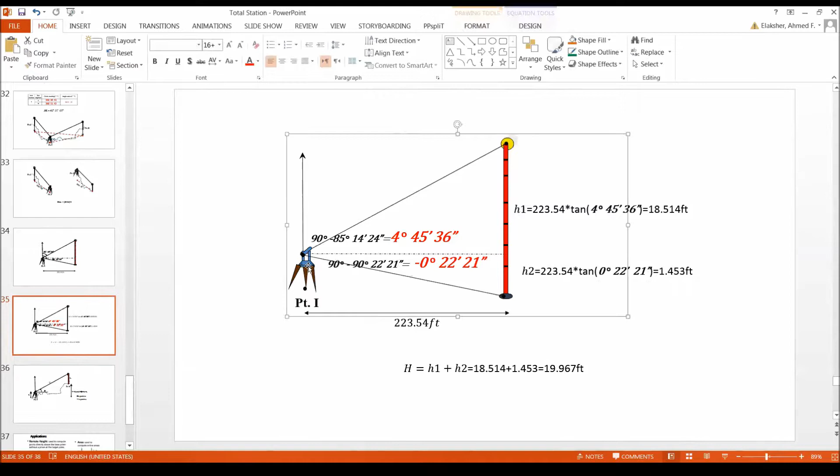I didn't describe this too much on purpose, because I want you guys to do the math here. That's a very simple example. Again, I have a theodolite, I don't have an EDM, I don't have a total station. With a theodolite, I can't measure distances. So what I did here, I measured the distance with a tape, and then measured the vertical angles to the top and to the bottom. Then from these two vertical angles with the measured horizontal distance, also measured with a tape, I can compute the height of the flagpole or a building. So make sure you know how to do that.

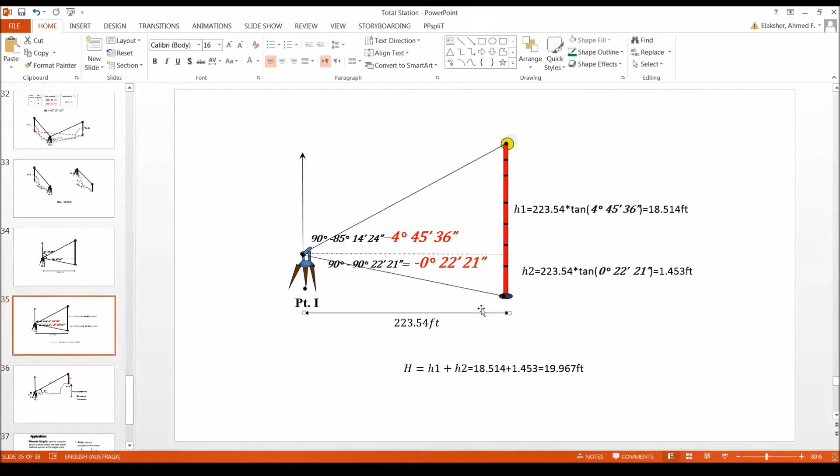So with the math, or with the theodolite, let's assume you have the theodolite here and the top here. What you can do is the same thing: measure the horizontal distance, copying this and pasting it here. Then you measure the slope or the vertical angle, and then you compute S. How can you compute S? I'll let you guys think about it. I know these are simple trig problems, so I'm not really focusing on it a lot. Any idea how to compute S from H if I measured it?

So S equals, I measure the horizontal distance, and I would like to get S. S equals what with respect to H? Leave that here, then you get the slope distance, and you can find the difference V between this point and this point. Very simple trick: S times sine theta, and since theta is looking upward, it's going to be positive. And then you add HI, you subtract HR. So a good way to show you this, I'm going to take this arrow, put it here, and show you on this side a simple way of doing it to understand the math.

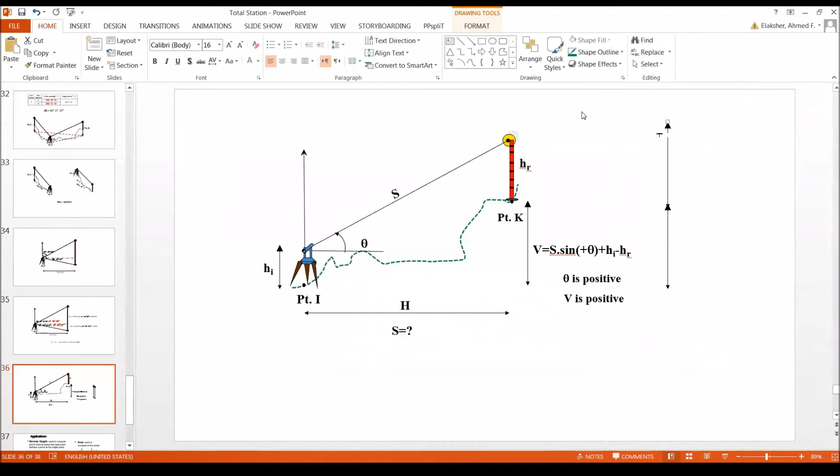So this is V here, that's what you're looking for, and this is HR here. So you can see both the V and the HR. On the other side, this equals HI plus this thing, which is S times sine theta. That's how you get this equation from, or where this equation comes from. So you add these two, they equal these two, and then you can say V equals S sine theta plus HI minus HR, if you send HR to the other side.

Let me grab it and put it in Paint so you can see it clearly. This is what you see here: HI plus S sine theta gives you all this, from the top all the way to the bottom, this whole thing. HR plus V gives you the other side. So if you rearrange the terms, you get our equation here.

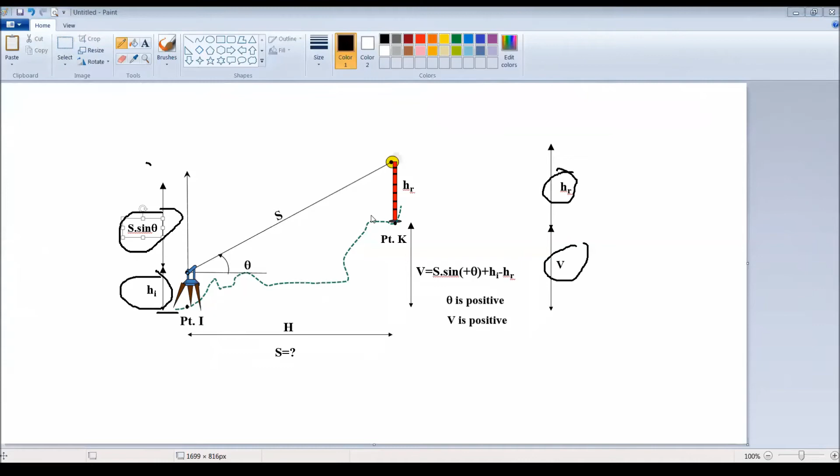Going back, please try to sketch it and make sure you understand what's going on here.

A couple of other applications: you can use the total station to stake out, to set stakes, to set building corners, to set centers of roads, for example. You can use it to measure or compute areas. You set the prism pole on different points and have the total station observe these points and then compute the area for you.

You can determine remote height. If you would like to get the depth, for example in this case, you can't really measure all the way the depth or height of the bottom of this bridge. So you can bring the prism pole all the way below the bottom of the bridge, shoot it, and shoot the vertical angle to the point above it, and have the instrument compute this distance for you, the depth or height from the ground to the bottom of the bridge.

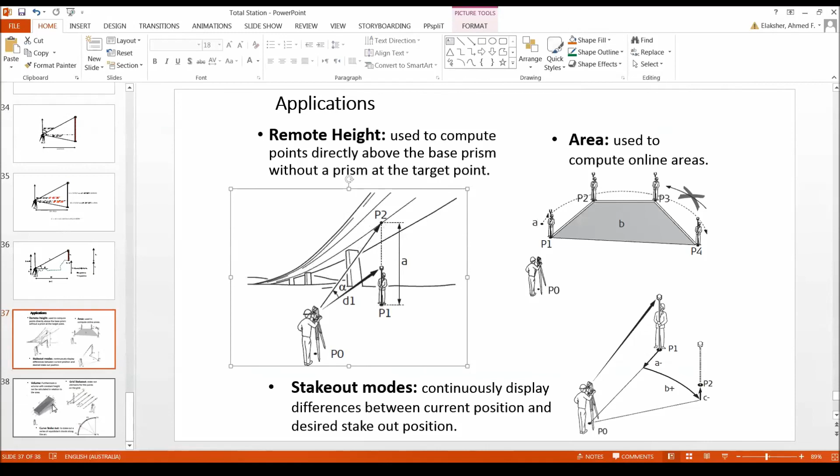You can have it compute volume, stake out grids, stake out curves, lots of applications. That makes this class—again, just to make sure—this is the February 13th class.